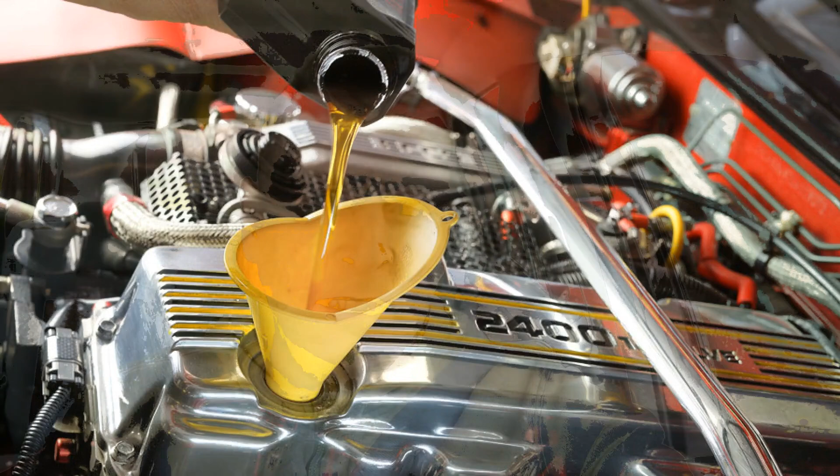Let's get into it. When it comes to the choice of engine oil, for example, for its routine replacement, the opinions of even experienced motorists in most cases diverge. In fact, it turns out that viscosity, the main parameter of oil, is not obvious from the point of view of its operational properties. Indeed, it is unlikely that you will be able to hear from sellers, employees of service centers and service stations, or ordinary owners of vehicles an opinion about one or another which would be absolutely identical.

In fact, although viscosity is a rather abstract concept, it has quite specific physical and chemical properties, on the basis of which the accepted classification system of motor oils is built. This will be discussed in this material.

Definition of oil viscosity. Even schoolchildren know that any lubricant must prevent the phenomenon of dry friction between moving and touching parts. With regard to an automobile engine, the task of oil is correspondingly to reduce the friction force in the cylinder piston group, while ensuring maximum tightness of the cylinders. The solution of this task does not look trivial because the power unit has to work in a very wide temperature range, from cold engine starting in winter to plus 300 °C. Such a mode is typical for some nodes of the warmed engine.

Note that many drivers are convinced that the temperature displayed on the scale of the device measures the temperature of the engine itself. This is, of course, a misconception. The sensor measures only the temperature of the coolant, and on the warmed-up engine it is almost the same in the whole circuit and is about 90 degrees. Nodes of the power unit warm up differently. Accordingly, the temperature of engine oil also varies, and within a wide enough range, reaching values of about 150 °C.

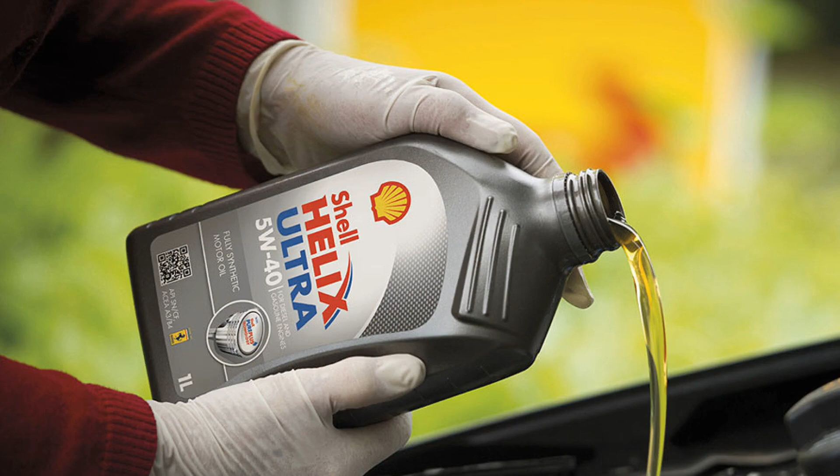The so-called low-temperature viscosity, indicating the possibility of starting the engine at a certain negative temperature. You can calculate it by subtracting the value of 40 from the specified figure. That is, 5W means that such a fluid provides trouble-free engine starting at temperatures of at least minus 35 degrees Celsius. Note that this indicator refers only to the lower temperature threshold for a cold engine, without affecting the performance of the oil used on a hot power unit. But again, oil manufacturers calculate this parameter on the basis of tests on specific engines, so it is, so to speak, average.

In reality, everything depends on the specific motor, so you should be guided by the recommendations of the car manufacturer, not by the labeling. Note that if the maximum frosts in a particular region do not exceed 20 degrees C, you can use oil with almost any prefix, because oils with an index greater than 20W are very rare on the

market. The second group of figures indicates the high temperature viscosity index, but there is no direct dependence on temperature. It denotes a certain generalized parameter that characterizes the minimum/maximum viscosity when operating in the operating temperature range, which is an average of 100 to 150 degrees Celsius.

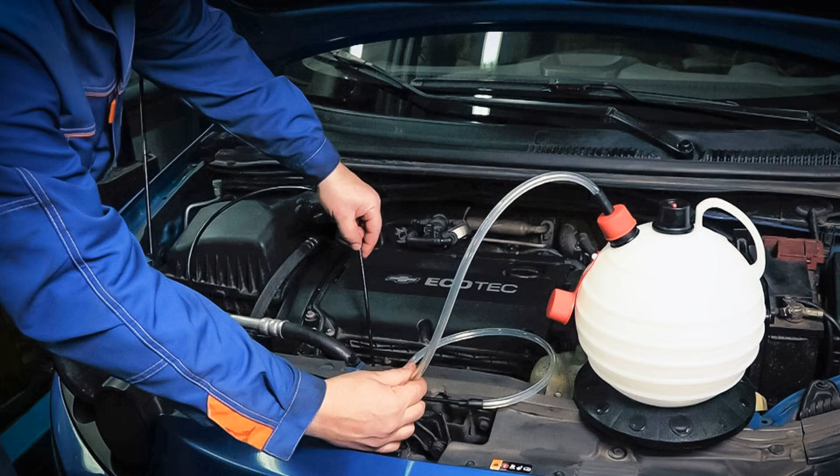The higher this parameter is, the higher the viscosity of the oil when operating in a higher temperature range. And liquid oil will not be able to ensure the fulfillment of its direct duties to lubricate the rubbing surfaces. So the interpretation of the second pair of figures, even among specialists, causes certain disagreements, and the advice to adhere to the recommendations of automakers is even more relevant here.

Main viscosity parameters. There is another misconception among many motorists. It is also connected with the interpretation of oil designation according to SAE classification. So, many drivers are convinced that if the letter W is present in the name, it is an all-season product, by analogy with tires, and that there are also purely winter and summer lubricants.

As we have already noted, in reality, each oil is characterized by a pair of values that work independently of each other. To meet oil without the letter W in the sale is almost impossible, although theoretically the standard allows it. Let's consider how to determine the viscosity of engine oil on the example of all the parameters that determine

its characteristics. Low temperature viscosity: it indicates the pumpability of the fluid through the line at a certain sub-zero temperature. This parameter is called crankability, i.e., the ability to turn the crankshaft to start the engine. If the air temperature is below the calculated parameter, the oil will thicken to such a state that the starter simply will not cope with its task.

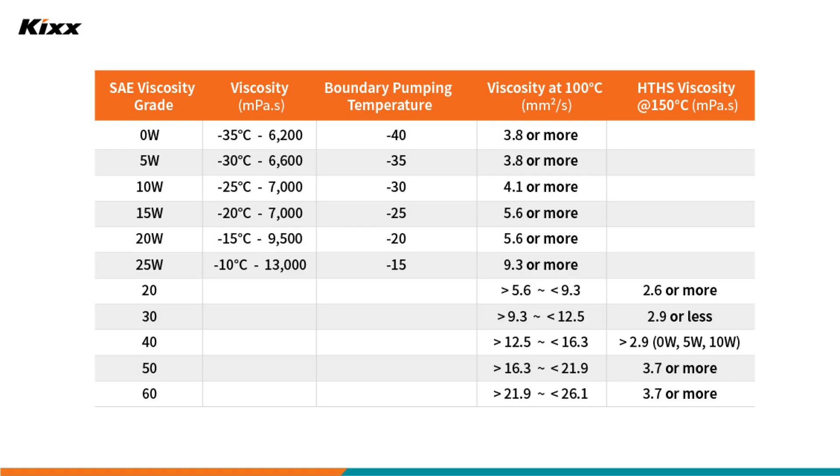High temperature viscosity: the viscosity grade of the engine oil, indicated after the letter index, has nothing to do with the ambient temperature. Regardless of whether it is freezing outside or 40-degree heat, this parameter is designed for more extreme temperatures, characteristic of the internal surfaces of the power unit.

And if somewhere on the expanses of the internet you meet the statement that oil 5W50 is suitable for hot regions and 5W20 for areas with a moderate climate, it is obvious nonsense.

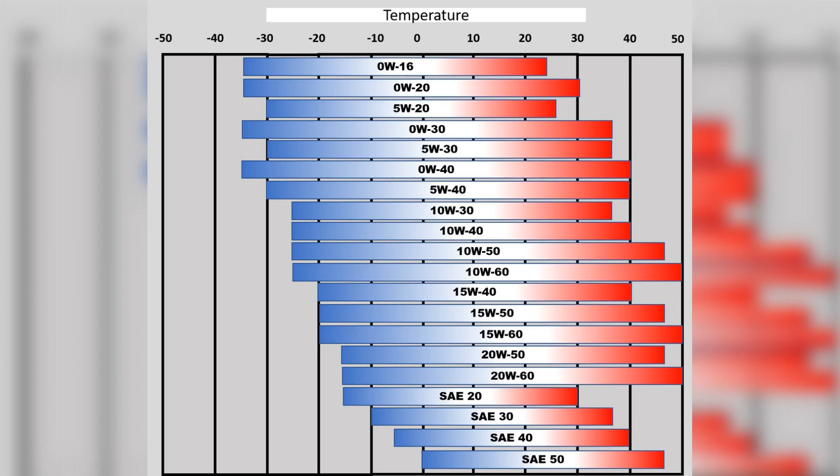A higher viscosity index indicates that the lubricant is of higher quality. It should be emphasized that the viscosity index is in no way related to the SAE viscosity. It is determined based on the composition of the base mixture. In particular, for mineral-based oils, the viscosity index is in the range of 85 to 100 units. For semi-synthetics, it varies in the range of 120 to 140 units. Pure synthetics are characterized by a viscosity index at the level of 160 to 180.

In practice, this means that motor oils with a high viscosity index, for example, 5W20, can be used in turbocharged engines characterized by a wide range of operating temperatures. To increase the viscosity index, binding additives are introduced into the lubricating fluid, the main task of which is to extend the temperature range of oil application. Thus, the higher the index, the more universal the oil will be.

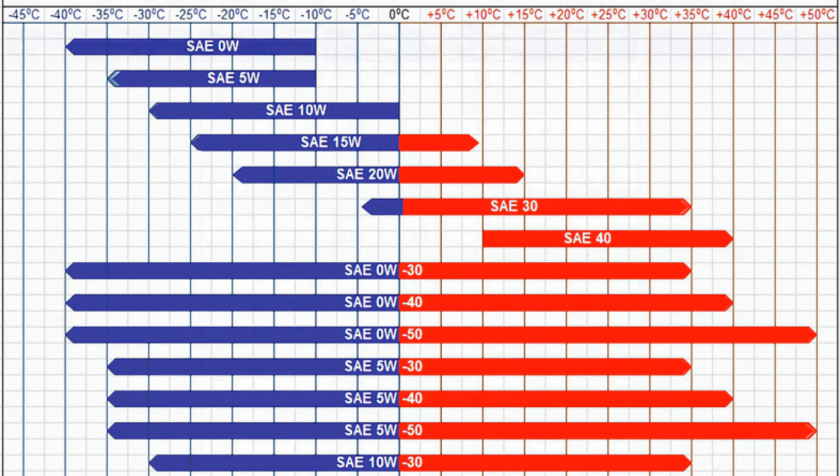Classification of motor oils. The existing division of motor oils is associated with the diversity of their compositions. The following groups of classifiers are generally accepted: depending on the chemical composition of the lubricant, mineral, semi-synthetic, synthetic oils; by viscosity index according to SAE standard; depending on the quantitative and qualitative composition of additives, according to ACEA/API classification; according to engine oil tolerances defined by car manufacturers. Each of the described groups does not provide a clear recipe which oil should be considered the best.

The applicability of oil is a relative concept and depends on many factors, from climatic conditions in a given area to specific features of operation of a certain engine model. And it should not be considered that the latter is an unimportant factor. In fact, the technical diversity of automotive power units is so great that it can be called a determining parameter affecting the choice of oil. Engine volume, its design features, materials used in the manufacture of highly loaded units. All this has a direct impact on the possibility of using a particular composition of lubricant. And, as it happens in almost any field of engineering, improvement of one parameter has a negative effect on another.

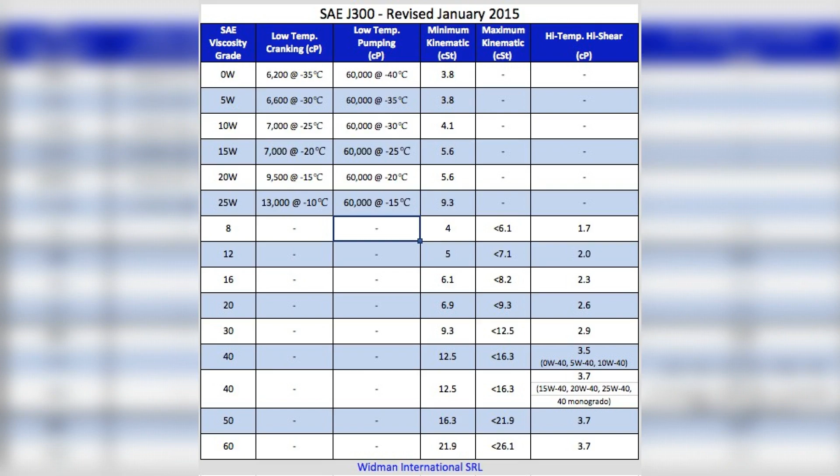Let us explain the above on the simplest example. Budget cars at a crankshaft speed of 3,000 RPM develop a speed of about 100 to 120 km/h. Mid-level models at the same revolutions accelerate to 140 to 150 km/h. And for sports cars, this figure reaches a mark of 200 km/h and above. And do not be surprised that in all these cases you will need oil with different characteristics. How to know the viscosity of engine oil and other parameters depending on the specific case is, in principle, a non-trivial task, the solution to which this article is devoted.

API standard. This classifier has a more venerable age than SAE. It was developed by the American Petroleum Institute back in 1969. According to this standard, motor oils are divided into 2 large subspecies: for gasoline-powered engines and for diesel-powered engines. Each of the subspecies is divided into quality classes. It is not without reason that this classification is called the oil quality standard.

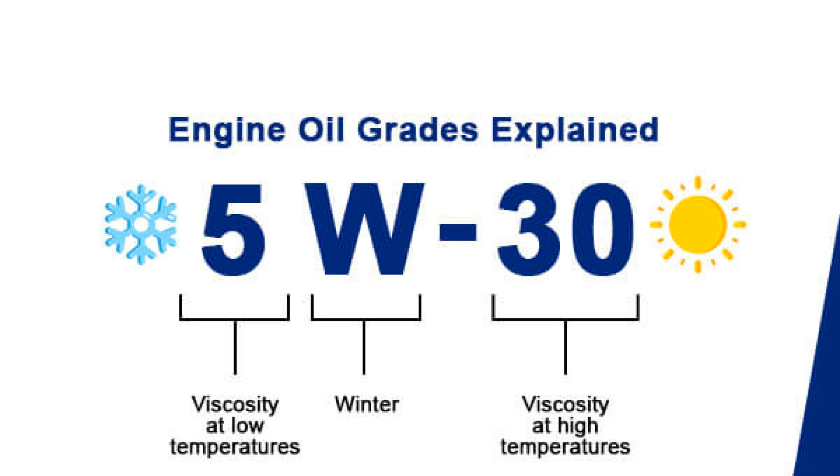Belonging to a class is determined by the first letter of the standard designation, S for gasoline, C for diesel-powered power units; the second letter denotes the quality class. The closer the letter is to the beginning of the alphabet, the more obsolete class the given oil belongs to. At the end, there may be a number indicating for which motors the product is intended, 2-stroke or 4-stroke. If on the oil label there is no indication of its belonging to the API standard, it is either so outdated that it would be unwise to use it, or it is not certified according to this standard at all.

Universal oils suitable for both types of engines are designated accordingly, with a slash, for example API SJ/CF. Usually, the parameter that is more preferable comes first. With regard to the above example, this means that the oil is in principle intended for gasoline engines. However, its use in diesel engines is also permissible.

It should be noted that the API class designation has nothing to do with the viscosity of motor oils. At the same time, the standard, despite its venerable age, is not static. The appearance of new additives leads to the formation of new quality classes. The last such modifications of the standard were made in 2006.

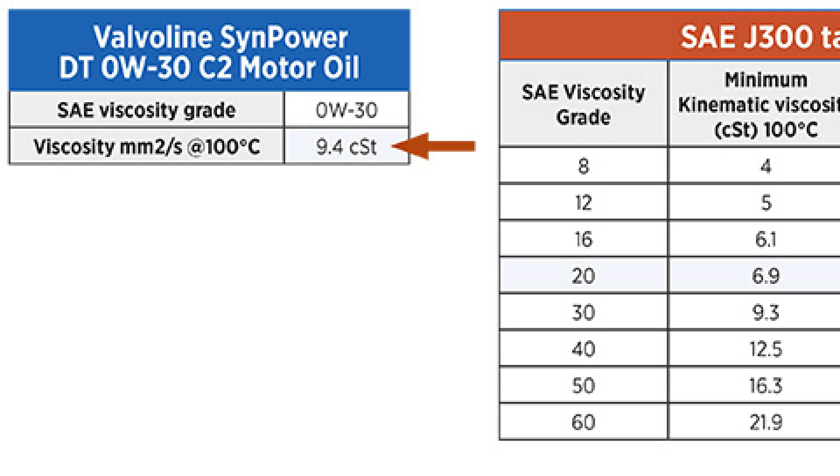Operating temperature ranges according to SAE: the viscosity of oil according to SAE is calculated under the operating temperature range. It is considered to be 100 to 150 degrees. It is clear that when starting a cold engine, especially in frost, the motor requires more effort to overcome the resistance of the liquid with increased viscosity. That is why all automakers, without exception, categorically do not recommend loading a cold power unit until it is fully warmed up, if the temperature outside is sub-zero.

But even if you adhere to these recommendations, the procedure of starting a cold motor in a strong frost reduces its total resource by 250 to 500 kilometers, according to the statements of many experts. However, this is practically not reflected on the resource of the oil itself. There is also positive news. As the engine ages, the gaps between rubbing parts increase, which reduces the degree of influence of high-viscosity oils on the motor when starting it in frost. Read also: how to start a long idle car.

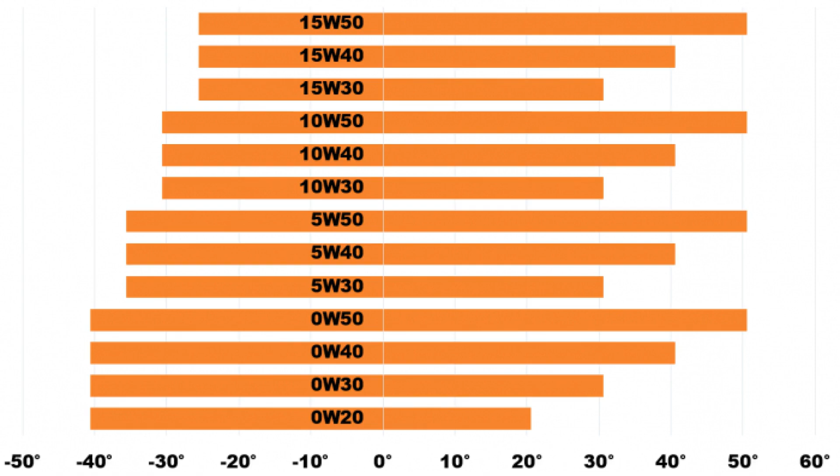On a warmed-up motor, the parameters come into compliance with the operating temperature regime, and the output to the operating parameters occurs according to the following scheme. With increasing engine speed, the coefficient of friction also increases. The temperature of the oil itself increases due to the increase in resistance. Its viscosity decreases. The thickness of the oil film on the surface of the protected parts decreases. The coefficient of friction decreases inversely. This is accompanied by a drop in oil temperature. As a result, in any mode of operation of a warmed-up engine, over time the characteristics of the lubricating fluid become optimal. But this applies only to those temperature ranges that are characteristic of a particular power unit.

In other words, the efficiency of the motor depends not so much on the viscosity of the lubricating fluid itself, but on the dynamic viscosity values at different temperature regimes. These, in turn, can vary greatly depending on the design of the power unit. It should not be forgotten that the efficiency of engine oil has a direct impact on a number of other important vehicle performance characteristics, including fuel efficiency and overall service life.

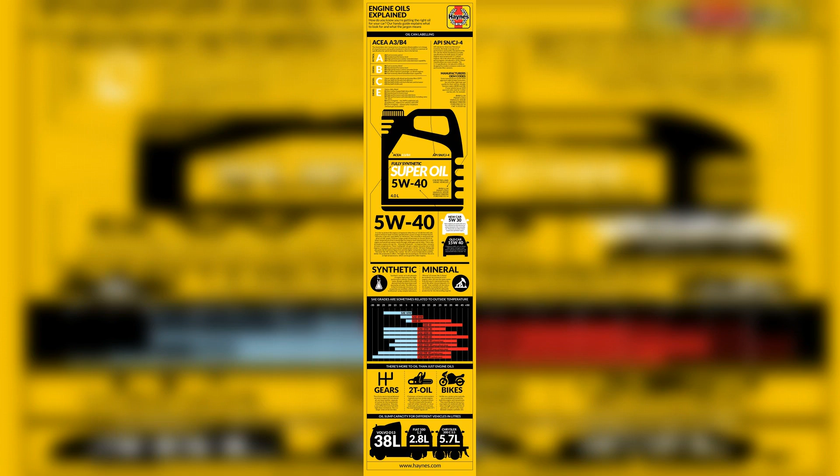Of course, if the coefficient of friction depends on the viscosity of the oil, the range of operating temperatures, and the value of clearances, then the average car owner cannot determine these values. And there is no need for it, because there is a table of viscosity of motor oils, which describes in detail their properties depending on the SAE class. And the European classification ACEA even describes specific tolerances for motor oils depending on the viscosity/operating temperature. However, in the SAE classification, there is also a gradation for low and high temperature viscosity, and the latter is defined for kinematic and dynamic components. All these values are indicated in the table.

We note from ourselves that a particular oil can be characterized by different viscosity values depending on temperature, and the number that is indicated in the product name after the letter W is in no way correlated with the real viscosity. Unlike low temperature values, kinematic and dynamic viscosity values are measured at specific temperatures, 100 and 150 degrees Celsius, and in intermediate modes the values may vary, and not always according to a linear law. To summarize the above, the viscosity index of oil is not in itself a criterion of its quality. What matters is whether the operating temperature ranges are suitable for a particular motor. Here is a table showing the measured viscosity values depending on the oil's SAE class.

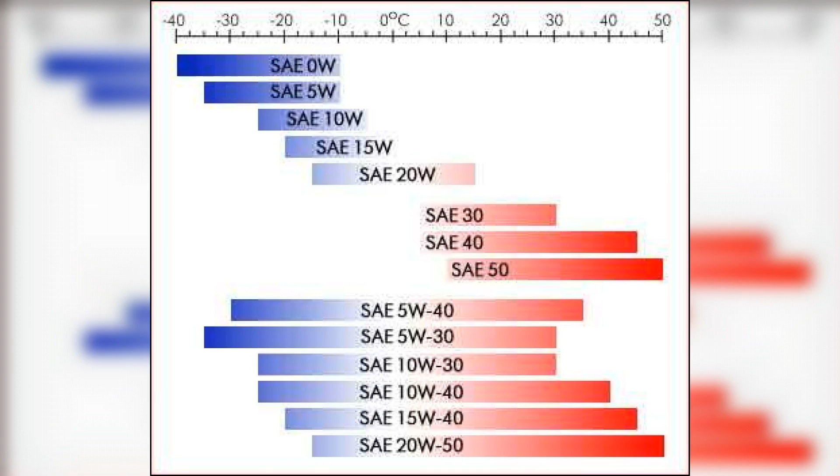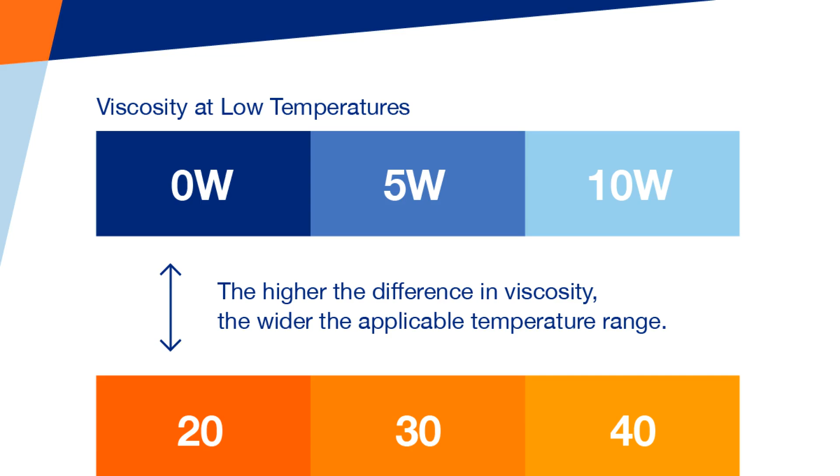Class; low temperature viscosity, mPa*s at temperature, degrees: crankability index, pumpability index; high temperature viscosity: kinematic, measured at 100 degrees Celsius, mm2/s; dynamic, measured at 150 degrees Celsius and high surface velocity, mPa*s, min-max. 0W: 6200.0, -35, 60,000.0, -40, 3.80. 5W: 6600.0, -30, 60,000.0, -35, 3.80. 10W: 7000.0, -25, 60,000.0, -30, 4.10. 15W: 7,000.0, -20, 60,000.0, -25, 5.60. 20W: 9,500.0, -15, 60,000.0, -20, 5.60. 25W: 13,000.0, -10, 60,000.0, -15, 9.30. 20: 6.90 to 9.30, 2.60. 30: 9.30 to 12.50, 2.90. 40: 12.50 to 16.30.

3.50, 0W/5W/10W, 40, 12.50 up to 16.30, 3.70, 15W/20W/25W, 50, 16.30 to 21.90, 3.70, 60, 21.90 to 26.10, 3.70. Is it acceptable to mix oils of different viscosities?

In the process of car operation, situations often arise that require refilling of lubricating fluid. And one of the main questions that many car owners are interested in is whether it is possible to mix oils that differ in viscosity, composition, or at least brand. The reasons for refilling oils or mixing them during routine replacement can be different. The possibility of saving money. Many drivers practice such a method as mixing part of the old with new engine oil, hoping that such mixing will not greatly reduce the replacement interval.

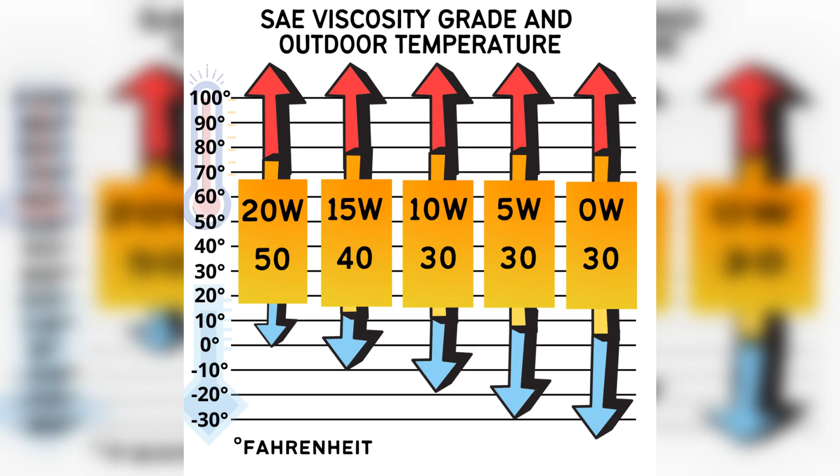If an unscheduled measurement of the level shows that it is below the MIN mark and the need to travel remains at a critical level, in such cases the first grease that comes to hand is used. This allows you to get to the nearest service station without any problems. Of course, this method can be called extreme, and in most cases, after its use, a complete replacement of the fluid is required. But even if you completely drain the old oil during an oil change, some of it will still remain on some parts of the powertrain.

And even flushing does not guarantee that you will not end up with a certain mix, albeit with a minimum concentration of the previous brand of oil. However, this option is usually not considered as capable of affecting the engine life in any appreciable way. In general, mixing oils with different viscosity grades is not a good idea. What happens if you mix oils of different viscosities?

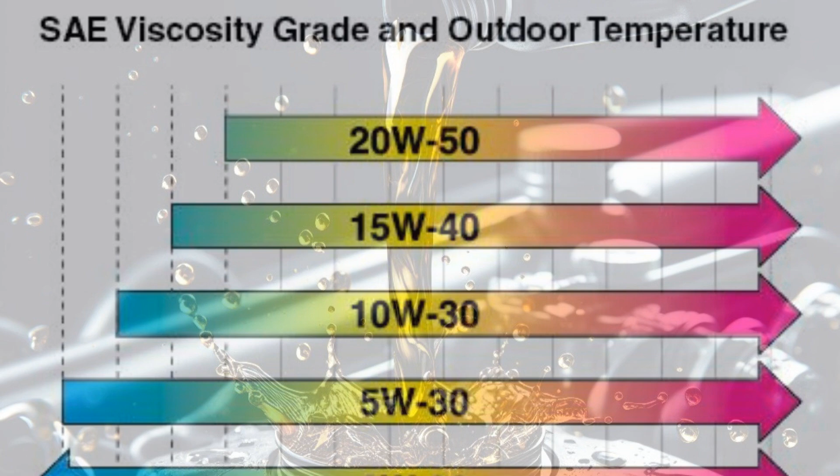The point is that low viscosity lubricants, which we consider to be winter oils, when mixed with summer oils do not form a universal composition, the temperature characteristics of which are obtained by adding the viscosities of each oil separately. What will definitely happen is the reduction of both low temperature and high temperature components, and as a result, the stability of the oil film will suffer greatly. However, if the indices in the marking differ only by one step and only in relation to one of the two digits, we can talk about the relative admissibility of such mixing.

If for your car native is oil 5W40, adding lubricant with marking 5W30 will reduce viscosity at high temperature mode of operation of rubbing surfaces of the power unit. Automakers in principle do not prohibit pouring oil that does not comply with the recommendations, but provided that at least at the level of viscosity classes, the old and refill oil will be compatible. So, topping up oil of a different viscosity is a method that should be used only if absolutely necessary. Usually car owners have leftovers of the oil they poured when replacing the oil, so this question is not particularly common. Which viscosity oil is better to choose?

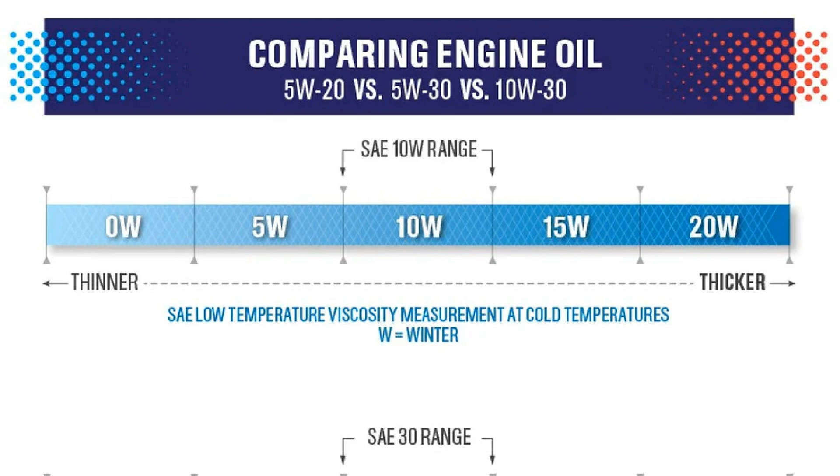Much more interesting is the case of a complete replacement of the filling liquid. The counters of auto stores are literally flooded with lubricants from different manufacturers, with declared viscosity characteristics according to SAE. Theoretically, the choice of a suitable one should be reduced only to the choice of the appropriate viscosity index. But there are nuances here as well. And if we take into account that many users are sincerely convinced that the higher the index on the label, the better, then the problem of choice really becomes difficult to solve, and often the final decision is made with the help of an outside expert.

If this person is not known to you personally, you should definitely refuse such advice, especially if he claims that by pouring sports oil into your vehicle, you will turn the car into a monster. In fact, everything will happen exactly the opposite. The engine power will drop, and its resource will be significantly reduced. Thus, you yourself will have to decide which oil viscosity is better, guided solely by the recommendations of the car manufacturer. In conclusion, understanding engine oil viscosity is essential for maintaining your vehicle's performance and longevity.

By recognizing the significance of the numbers on the oil container, you can choose the right oil for your engine's needs, ensuring optimal lubrication and protection under various conditions. Remember, a well-chosen oil not only enhances efficiency, but also contributes to the overall health of your engine. Stay informed and make the best choices for your vehicle to keep it running smoothly for years to come.